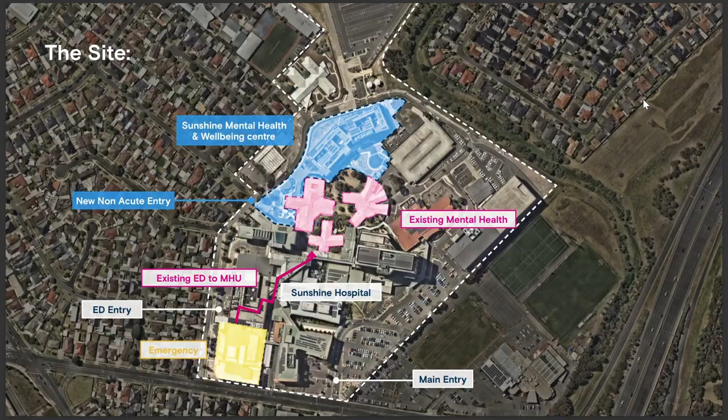The building is designed as a 52-bed unit over 2 levels and is made from 330 steel modules. We created a new non-acute front door for the hospital, which is for a mental health precinct, deliberately separate from the hospital's front door. The traditional mental health layout is the panopticon, similar to prisons, where consumers have very little privacy and accessible courtyards are external to the building, which then requires tall containment fences.

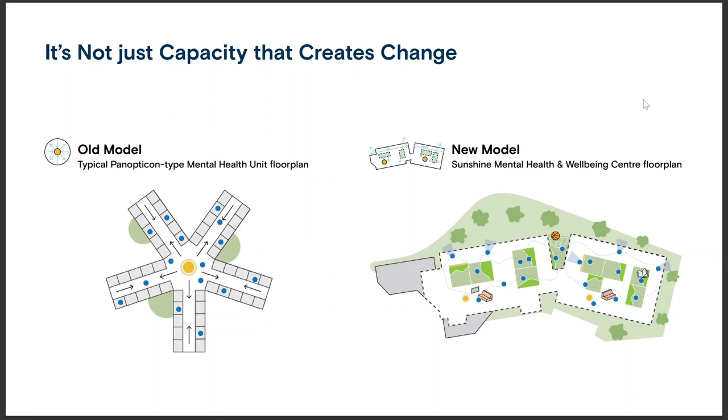Our new model internalises those courtyards, creates the building as the boundary and mitigates the need for tall containment fences. It also maximises the daylight into occupiable spaces and provides immediate access to the landscape and spatial legibility. Our collaborative and integrated co-design process with people with lived experience ensures that the project delivers evidence-based designs that are recovery-focused and promote wellbeing for all occupants.

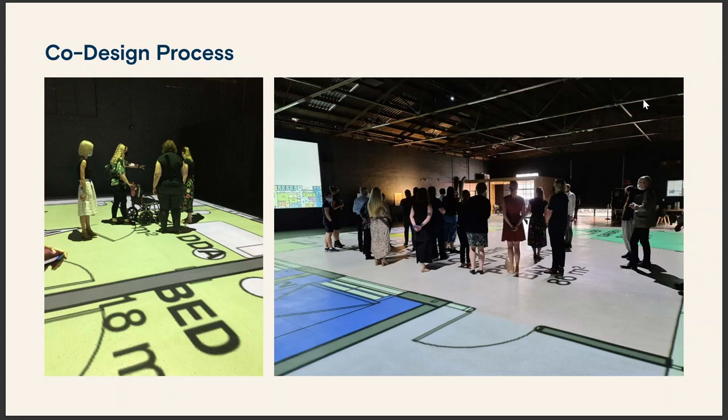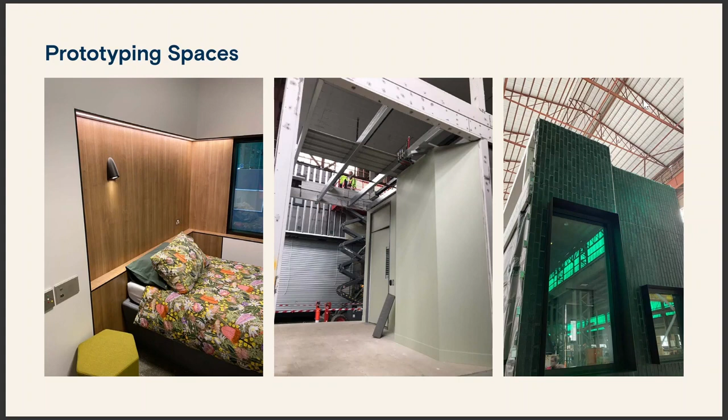The bedrooms and en-suites are critical parts of the building, as these are the places where consumers are left unattended and unobserved and where most self-harm can occur. We built a full-scale modular prototype which was inspected and rigorously tested. To minimise all ligature opportunities, there could not be a gap or a hole greater than 2 millimetres within the internal fabric. The internal environment minimises risks to both consumers and staff and reduces opportunities for adverse events to happen.

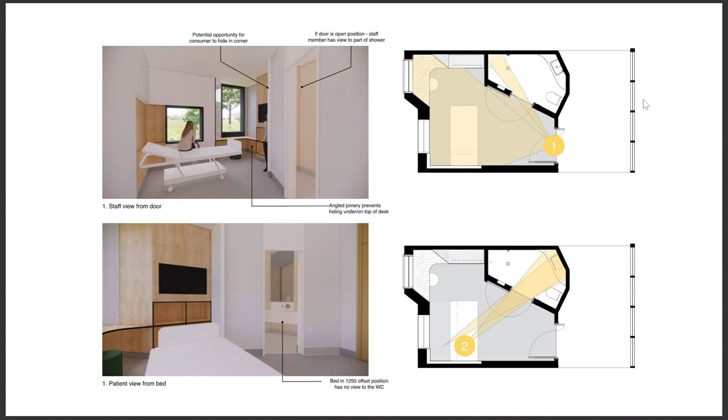Detailed analysis was undertaken on the layout of the bedrooms and corridors to ensure there were no hidey holes for consumers to hide and to mitigate ambush situations on staff and fellow consumers. On both levels, the bedrooms are predominantly positioned to the north with views to nature, and each pod is clustered around one of 4 stepped courtyards.

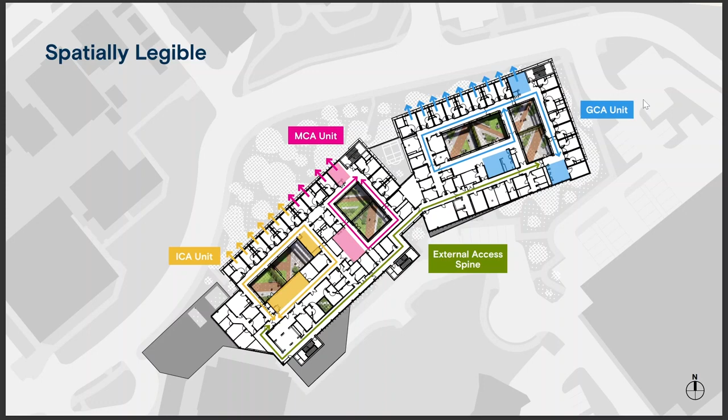The Royal Commission recommended smaller cohorting, moving away from traditional large cohorting. We created a share house type environment with a backyard and dedicated living and dining spaces. As mentioned, spatial legibility was important to help consumers understand where they are within the building, which helps reduce anxiety. Courtyards and artwork are 2 devices that support this. There are 27 custom integrated pieces of artwork which help consumers understand where they are.

So, salutogenic is a term that means the building's active role in healthcare. It helps you to get better. And biophilic, as we understand, is bringing nature into the project. Those 2 principles are paramount to how we deal with these projects, even though obviously we have all the parameters of healthcare and safety, 2 mil gaps, no ledges and so on. We still tried very hard to make sure the place felt incredibly light-filled, familiar, and had nature at every turn.

We in fact had the opportunity for 27 artworks throughout the project, which we helped select, which meant that spatial legibility is enhanced through the idea that only one image appears in one place, so you always know where you are. Each space was obviously very important.

There was both light-filled and views out, rather than the high wall, but even down to the lighting you see above your head is custom built for this project and it features circadian rhythms, so it changes lighting along with the day to again enhance the idea of understanding the world in which you live in rather than being institutionalised.

Expanding on the idea of light is the access to natural light. Most panopticon plans never had direct view to the outside. You went through a doorway to an external courtyard. In this case, we organised these effectively 6-person share houses around a courtyard.

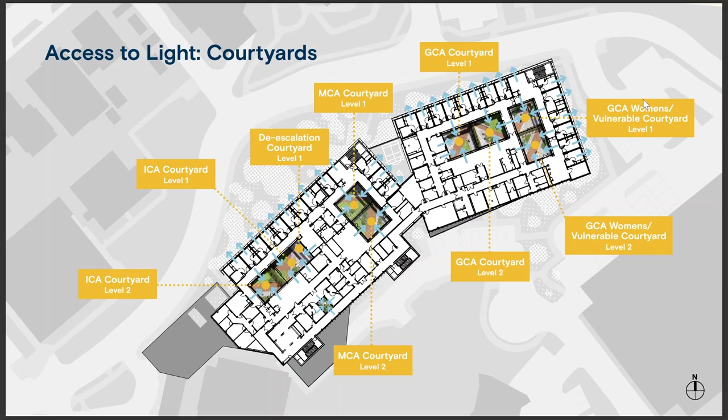You can see through, across and access at any time with natural light into all living spaces, of which they have a primary and a secondary living space. That then enables us to have limited amount of segregation between spaces, and when we do, we try to use things like glazing and other elements rather than the institutional style walling.

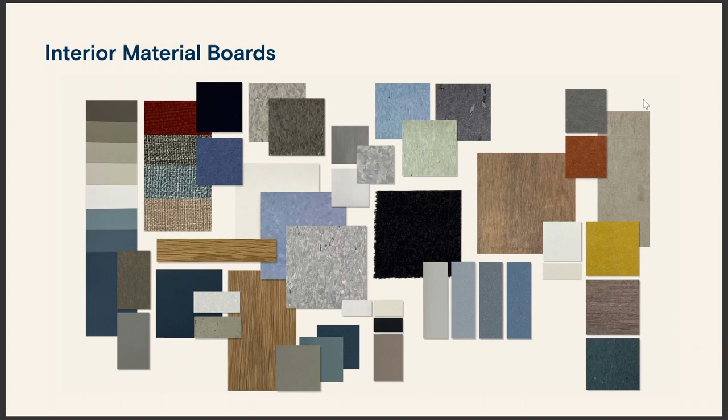One of the things that was also very important to us, obviously being an acute healthcare environment, we are restricted to the sort of materials you think of in healthcare, and yet what we worked really hard with suppliers was to think about calming colours and colours that were familiar, fabrics that might feel familiar to a home, rather than, you know, the institutional primary school colour set you see within hospital spaces quite often.

And then deployed those judiciously to give subtle readings of intimacy and openness. So we created lounges and things through using the materiality to create intimate and lower spaces, and then the circulation where the courtyard becomes the main space. So the courtyard really becomes an extended part of that. As I said, the artworks are actually all local artists that were commissioned to come and hand paint artworks almost as a message of hope back into the people who occupy these spaces and become the fourth wall of all the spaces.

I've lost my track. So really the last point to make is that this is a hospital environment, so it cannot be a home, but it can be familiar and it can be domestic in nature rather than institutional, by picking colours and tones that you'd actually see within your own home, but also materials that create better acoustic outcomes, allow the environment in, and allow light to bounce around and become a really positive space.

Those contemporary palettes continue to push through to how we deal with things like living spaces, using a darker colour to create a smaller, warmer space, or working really, really hard with the very limited mental health furniture industry that's out there to get better fabrics on the chairs and things that can actually start to talk about something you might actually want in your house rather than something that's cobalt blue.

And then down to even when you're thinking about the bedrooms and the consumer spaces, building in the idea of a bedhead, the idea of bringing the window around as a timber piece, so that idea of the outside world starts to become, and the biophilic materials become part of the environment you're sleeping within and the coloration of the space.